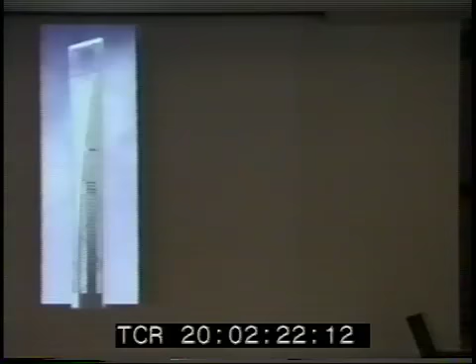So the goal here, of course, is to make money for the developer. That's why people build buildings. They don't build buildings to make you feel good or to make us feel good. They build buildings to make money. So we try to make money for developers, contractors, and other people.

The World Trade Center, for us, started in 1962. The architect, Minoru Yamasaki, received a commission to design the project. We had been working with Yama largely because of the talents of one of our partners, Jack Christensen, who produced a fantastic design in our first venture with him. But we got this project not because of Jack or because of me, but because neither one of us could have done it alone—it was because of John Skilling, one of those persons who has the golden tongue and is a real entrepreneur type. He was the one who actually made the pitch that got us the project.

So what is there about the Trade Center that's unusual? It has what we call a tubular framing system. People ask who invented the tubular framing system, and frankly, I don't know. I always blame it on Yamasaki, he always blamed it on me, and I always blamed it on Fazlur Khan. So somebody did it, I'm sure.

It's called an outrigger system. It was the first project put together with a linkage between the services core and the lateral core system, which in this case is in the outside wall—kind of a giant space ring. It was really neat because we had designed it but not actually included it in the contract. In structural engineering, it's good to have a back door—if this thing doesn't work, what are you going to do? So the space ring was part of our back door.

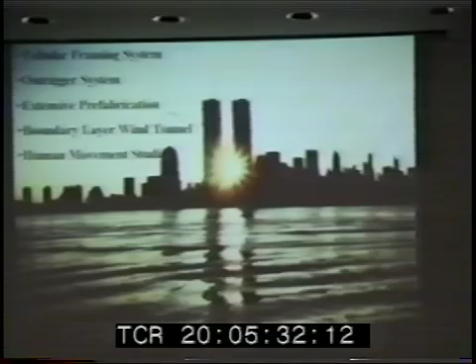Well, the World Trade Center is a billion dollar project when it was constructed, so you don't invest a billion dollars without being very sure. I went and rode motion simulators, and I have to tell you, if you ever get a chance to ride the motion simulators they use in the space industry, don't.

Then, in order to deal with the structure motion, we came up with the idea of a damping system. We looked at lots of different kinds, but eventually chose a viscoelastic damping system.

We developed a theory for taking the statistical nature of the dynamic pressures from the wind on the glass, as opposed to the statistical nature of the strength of glass, and put them together to try to determine the breakage rate of glass itself in the building.

And in buildings at that time, all the walls inside the building were made of block masonry, and they leaked a lot, and they were very expensive to maintain. So we developed again a theory for stack action. That's large buildings, kind of like a chimney - cold air outside, air rushes in at the bottom, rises up through the building, and goes out at the top. So we worked out a system that evaluated that so that we could design for the need for those pressures.

And then it was, I think, probably the first and maybe the last high-rise building or craft outside of the military and the atomic energy industry, first designed to resist the impact of a jet aircraft. In this case, the 707 intercontinental version, which was the largest aircraft of its time. We thought it was lost in the fog headed toward JFK or elsewhere, similar to the Mitchell bomber that struck the Empire State Building.

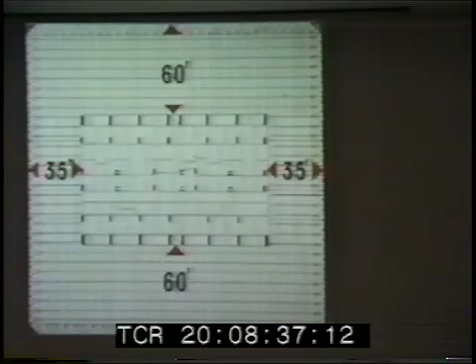And a lot of controversy over moving all these businesses out of that space. A lot of controversy. But they were well compensated for it, of course, but I don't think you can really ever get compensated when you're upended. And this whole district disappeared out of New York. There was no replacement for it, so there was no place you could go. Instead there was a store here and one over there and someplace else.

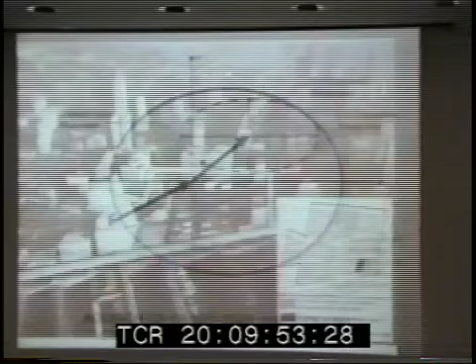Now we surmised, we didn't know, but we surmised that in the wind, if the wind blows, say in this direction, that the building would lean more or less downwind, not directly downwind, and then would oscillate about someplace. This came from experience that I had in working on offshore structures. I knew that that was kind of what they did, and I thought, well, a high-rise building might just do the same thing. You have to understand, the dynamics of high-rise buildings and the wind did not exist as a subject at that time.

This is a view of Lower Manhattan. The wind coming from the south heads up towards the northwest and goes over all these high-rise buildings, becoming very turbulent, whereas the wind coming from this other direction is over the water and is very smooth. So we designed for these two circumstances using this wonderful idea of Jensen and Franck.

Here you see the wind tunnel model. And remember, this is a billion-dollar project.

So we put a big tower on top of the telephone company building, put an anemometer on it, another anemometer on top of this spire, and another on a tower on top of the New York Athletic Club. We measured in full scale the turbulence of the wind over the city, then replicated it in the wind tunnel. And sure enough, it replicated, which gave us a lot of confidence that where we were going was kind of sensible.

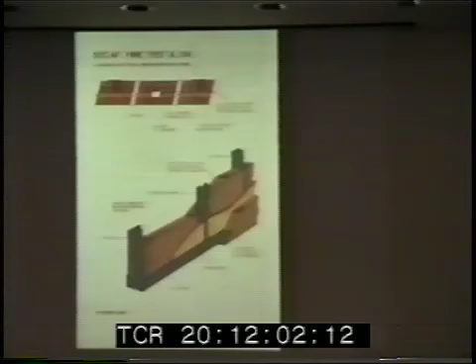The shaft wall partition system was wonderful because it was designed specifically to allow the structure to move without restraining it, and allowed the structure to move while still staying airtight.

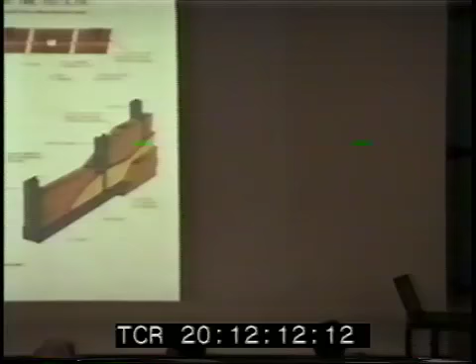I arrived at the idea because I rode on top of a lot of elevators in New York City, and went through all the buildings I could. Remember, the tallest building I'd worked on was 22 stories, so I thought maybe people who worked in New York might know something more than I did, which for sure they did. So I decided the basic partition system was terrible, sat down, and came up with this concept, which was then developed by U.S. Gypsum.

We did a complete structural analysis of the Empire State Building. This is a trace taken from accelerometers on the building. You see it's very almost random—no kind of neat oscillation can be found there. The only way you can come up with a period of vibration is to drop all this data into a computer and analyze it, and it tells you it's around 10 seconds, but you can't measure it here. So that's a 10-second period building—no way. Entirely different.

What was it about the building? The Empire State Building was designed for no wind load at all for the first 100 feet, and then 20 pounds per square foot above that. We were designing the World Trade Center for something in excess of 100 pounds per square foot. So you'd think the Empire State Building would have collapsed, or we were wrong.

But we did a structural analysis of the Empire State Building frame, and we could develop the stiffness of the frame, so we knew just how it would deflect under a given lateral load. Then by putting this data from accelerometers together with the known density, it's possible to experimentally determine the stiffness of the building. We found the difference was a factor of 5—the building was 5 times stiffer than the steel frame. All that came from the infill action of the masonry of the building, and we were designing a building without any masonry.

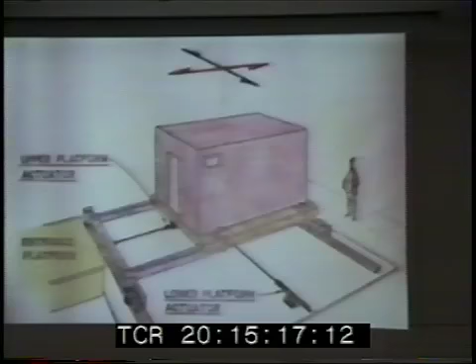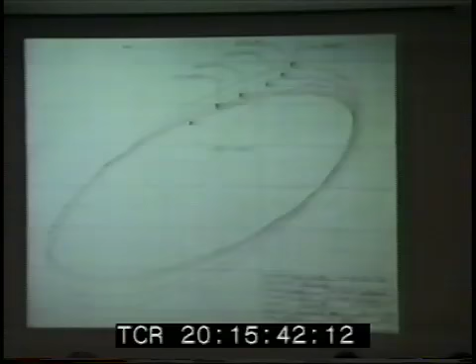And here you see one of them actually in the building. And then in glass—this is the glass, very narrow and very tall. And here you see the deflected shape of the glass. In this case, it's deflecting about 4 inches.

There was no data available on glass of this aspect ratio, that is long and skinny. Those of you who are structural engineers know that the strength is not really related to the span, it's more related to the area of the glass. But anyway, we tested lots and lots of panes of glass to find out how strong it really was, and also to determine what kind of glass to use. Ultimately, a semi-tempered glass went into the project.

Interestingly, about half the breakage of the glass has been due to bullets. That is, people from far away get a rifle out and lob bullets for fun, I guess. And at the lobby level, one guy was going by in a pickup truck with a slingshot and 1-inch diameter steel balls, and he would shoot at the glass. Each time he was successful in breaking one, it cost $15,000.

So here you see prefabrication. This is the bottom of the piece, and this is the top. These are big, big panels. These were prefabricated, and the guys go on top of that one. The floor system was prefabricated. Everything was fabricated.

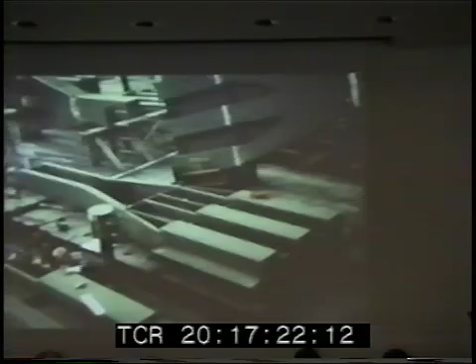Here you see in fabrication the length and width, the grade of steel, the welding that went into it—everything was provided to the contractor in punch card format. Those of you who are very ancient like me know what a punch card is. It's about so big, it's got lots of funny little holes in it, and from that you can read data. I don't know when they stopped using them, but probably before you were born.

Still using it for loading. Oh, I guess that's true. Well, we still use FM tape recorders too, but I don't know.

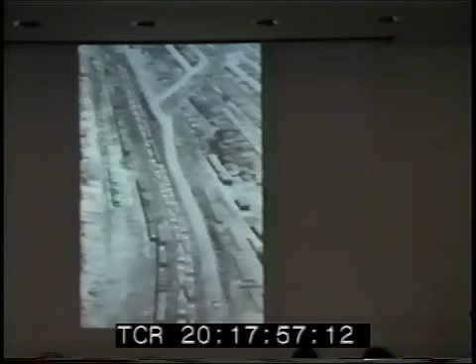Here you see some of those panels coming to the site, ready to be erected up in the project. So you see, it was an enormous logistics operation.

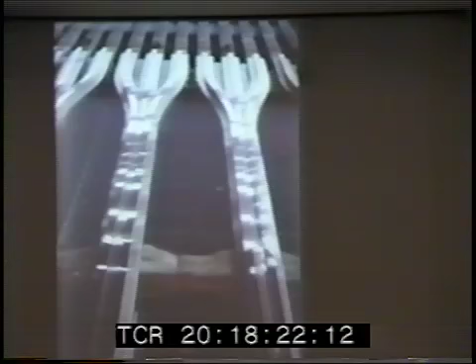So that panel we were talking about was spliced here. This was also prefabricated. When these aluminum panels were being put up, it was February, and the workers said, hey, these things are split, they're cracked. Now, steel was pretty much topped out, and if you don't think having split connections at the bottom is not an interesting subject, it was, of course. So we pushed the panic button and decided the problem came from water inside and freezing.

And again, we went as far from New York as possible—actually to Berkeley—and hired 2 esteemed professors who produced a report after a month and a half of work. They agreed that it was a freezing problem. In the meantime, we had to fix them all, of course, because you can't wait around for a report.

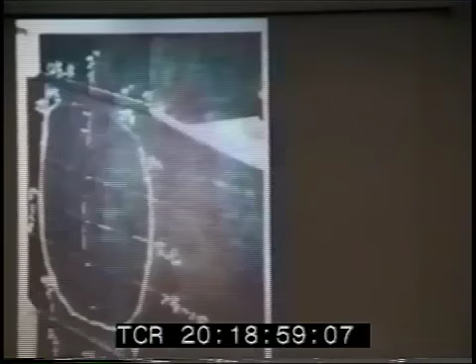This is sort of a standard piece, you see this bulge. Now, our client, the Port Authority of New York and New Jersey, was a fantastic client, absolutely incredible—they never said no on any subject. Well, they could be a little tough sometimes. But this is one instance when they overrode our judgment, putting control of water inside the structure in the hands of the contractor. Our policy is seal plates on all box sections so that you cannot get water inside for this very reason.

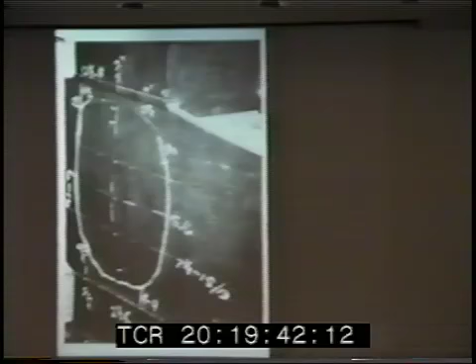That night, some 85 pipe columns broke on the split, on the adjacent small buildings under construction. These box columns were used for everything. If you had a hose with water running out of it, you didn't put it down, you just put it in the box column because then it didn't get people wet below. So there was water everywhere. We took out of some of these columns 600 gallons of water.

Billion-dollar project, let's not forget, after it was all done, got a completely new team, went down, looked for water, and found it. So, very big problem with water inside of the structures. But anyway, we got rid of all of it.

It's a prefabricated wall panel. There were thousands of these manufactured.

All the steel plate came from Japan, so punch cards, no way to send them across except by airplane. Today we wouldn't bother, but this plate and this plate and so forth, all of these were fabricated in Japan. In the United States, the steel industry was in the mood of, well, this is what we make, how can you use it? In Japan, it was, what is it that we could make that you could use?

So we bought steel for the project in increments of 5 ksi, which is fantastic for the overall toughness of the building, really fantastic. So we didn't have over-yield material in the project.

These were fabricated in the state of Washington. And this is a readout of punch cards.

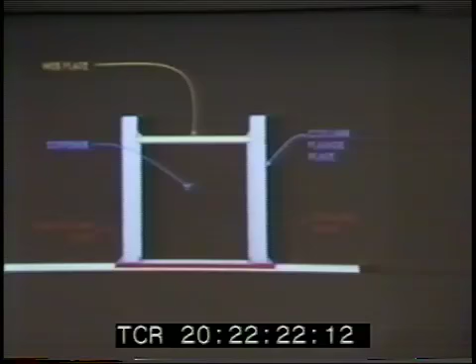Today, it'd be just like that. You pop this into your favorite finite element program, and out would come an answer. But at that time, that technology was not available, so we did most of the finite element work based on very big programs, but not suitable for actual practical work.

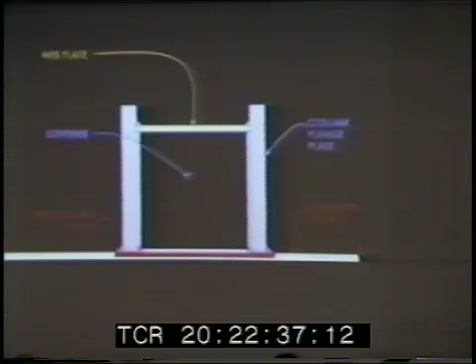So we did a lot of finite element work on the World Trade Center. Just to be this kind of example. Also did some physical testing, of course.

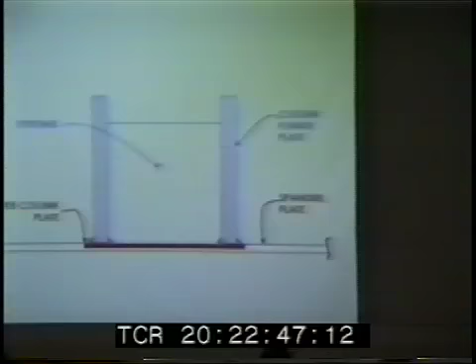So the way it was put together: first the bed sheet, as well as the flat plate, then the stiffener and the flange plate, and finally the web plate on top. It was done with such precision that it was possible to maintain a very tight tolerance between the architectural work and the structural work. Normally we would allow about 2 inches, that is 4 inches at the very least. But since our columns were 14 inches, that 4 inches was a big number.

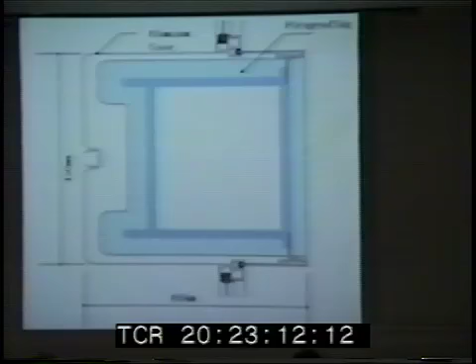Here you see them in fabrication. This is that first bed sheet, fabricated first. It was, in my experience, the first time that steel fabrication was done with the material moving by the workman rather than the workman going to the steelwork, leaning back on the technology, I guess, first popularized by Henry Ford.

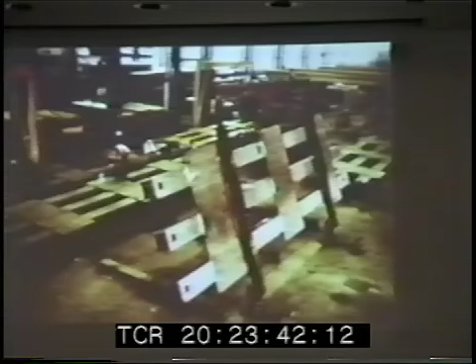Then assembled into big panels. Then these went into a jig, and the ends of the 3 columns were all milled in the jig without moving it. All the bolt holes were drilled in the panel, again without moving it. So we were able to maintain very, very tight tolerances in these panels. And it went together sort of like a Lego set. It was fantastic, they just went up, no problem.

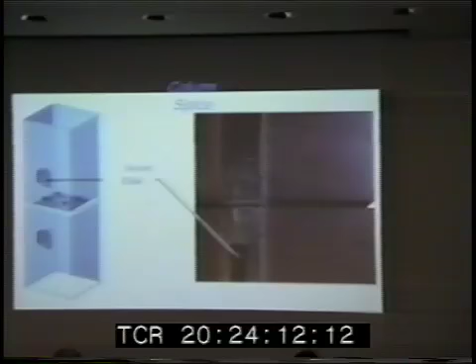To put them together, there were 2 holes, a large hole above at the bottom of the column and a smaller one at the top of the column. We basically put the impact wrench for tensioning the bolts right inside the column and tensioned the bolts.

The floor system was prefabricated. In this case, this panel was 60 feet long, 20 feet wide. The metal deck was already in place, as were the electrical distribution cells. So when you put one down, you created quite a significant space, 1,200 square feet. Here you see a panel in the air.

There was one attempt to bring these over by helicopter. These, of course, weigh almost nothing, they're mostly air. The pilot got over New York Harbor and decided he wasn't going to risk his life to carry it any farther. So sometime if you're out scuba diving in New York Harbor, you'll find it.

The associate architect decided it was important to have large openings through the facade. Remember, these columns are 40 inches on center. So they asked that we maintain big openings. This is a large opening, and diagonally across the building there's another opening just like it, and then down the side you have this one. So the openings are diagonally opposite each other, so that at no one level do they cross the complete building. But they were never used.

Great idea, like a lot of great ideas, didn't find fruition.

So here you see something about the whole assembly: prefabricated wall panels, prefabricated floor panels, and so forth. Not shown are the dampers because they were put in later.

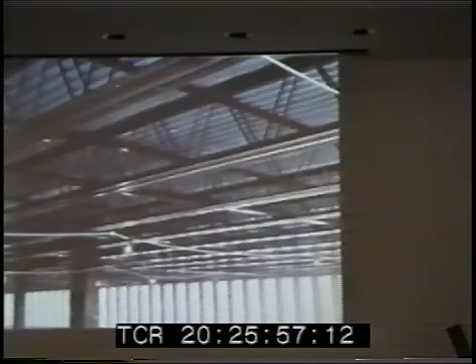The floor system has gotten a lot of press about being very vulnerable to all sorts of things. But in fact, it was designed so that you could remove, depending on where you were, 2, 3, 4, 5, sometimes 8 of these trusses, and the whole system remained stable. It was a grillage of trusses, as you can see here, not just a one-way system. Very, very sturdy system.

There's also been a lot of talk about the connection of these trusses to the outside wall. The normal criteria used by structural engineers is that the connection to keep a column from falling off the building is 2% of the axial load in the column. That's a good rule of thumb. This shows the actual connection capacity that was built into those spaces. So if you take the North Tower, it was designed for something like 15 or 18 times more than what you would consider standard criteria.

Here you see something about an important aspect of the Trade Center: not a single iron worker lost his life on the project. That was in no small measure because of this jail-like exterior of the building. Notice that the panels are spliced, only 1/3 of them in any given level. This is a splice, up one floor, another one, up one floor, another, so that there were no column splices in 2/3 of the columns in any given level, which again provided toughness and redundancy in the structural design.

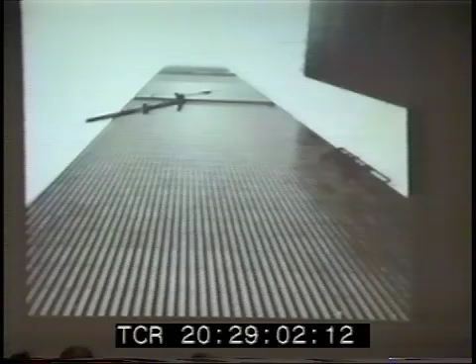Then there was the great day of the topping out ceremony. Here you see, well, it wasn't the last piece of steel, but a symbolic last piece of steel going up. I took this picture and then went inside, rode an elevator up, transferred, rode another elevator up, climbed a bunch of ladders and stairs, and finally got to the top, and this is what I saw. It was cold, and it was foggy.

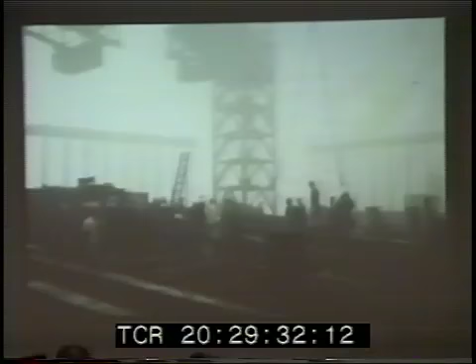Nobody knew where this piece of steel was, but I did, because I had been down on the ground. So I explained to the assembled throng where it was. I started out across the steelwork - in this case, it's the roof of the building. There's no prefabricated steelwork here.

And it was foggy, and it was cold, and the steel was icy. Let me tell you, it was really slippery. And I was walking very carefully. I have a yellow streak down my back.

But anyway, I got about halfway across the second beam, and I just stopped. I didn't know what the problem was, but I stopped, started to turn around and go back. No, I started forward again. Again, I stopped. And then I did turn around, and behind me were these TV crews.

They were walking across like it was nothing. Of course, when you have that kind of people behind you, you gain a new courage, or maybe you're too ashamed to show your fear.

But he didn't know until I explained it to him that these buildings oscillate in the wind. They don't do this way so that the cable stays nice and straight, but they do this kind of thing. So he was fortunate that no wind came up, and he's alive today and still performing. Great guy.

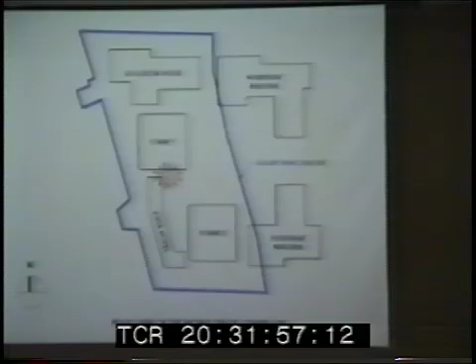We discovered that the bomb had gone off because we had 4 police cars out in front of our offices to take engineers down to the site. So we went down there. Actually, I wasn't there; I was at my house in Connecticut. But I discovered from the television that there was this problem. So we drove into the city.

The bomb went off, just coming from a metric world, about 6 feet from Tower 1, right in this area, right here. The bomb was about the same size as the one that took down the structure at Oklahoma City, almost identical in terms of the capacity.

But what happened was this steel wall, very heavy and robust, just reflected most of the energy of the bomb to the south. It blew a huge hole through the B1 level, and then caused structural damage about 350 feet into the south. Still significant structural damage.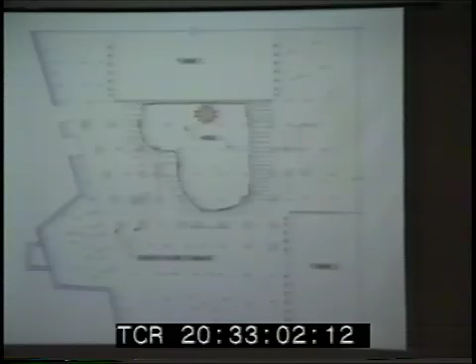But the bombers, I think, were trying to bring down the World Trade Center to make it collapse. But the most important thing that they did was they destroyed the airlock around the building.

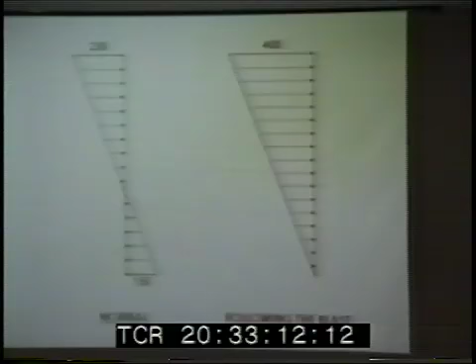Remember I talked about stack action? Well, when you go through the revolving doors of a high-rise building, you're going through an airlock. That's to prevent the air from rushing into the building, consuming a lot of energy and other things.

So when the bomb went off, it created a huge hole at the base of the building, and the pressure distribution went from something like this to something like this, and all of the smoke and soot and so forth from the bomb area immediately rose up inside of the towers.

And you saw photographs, I'm sure, of people coming out of spaces and clothes totally covered with soot, and great human suffering from that event. That was the worst thing that happened with respect to the bombing.

The next thing that happened was all of the debris from the collapsed areas of concrete work fell on top of the refrigeration plant. Now, it's just a refrigeration plant, you build a new one, but the problem is that if it couldn't be got into operation by June, you'd shut down the World Trade Center, because with no operable sash, no air conditioning, you cannot work in the building.

So Port Authority built temporary refrigeration plants outside. Now, the day of the bombing, or the night of the bombing, just before midnight, 4 of us went down to the basement to look at the refrigeration equipment because I wanted to know what was underneath all the debris. I knew it was there.

It was the refrigeration equipment, but 4 was too many people, and our flashlights were too small. So the next morning, after a couple hours of sleep, I went down by myself and looked at the refrigeration equipment.

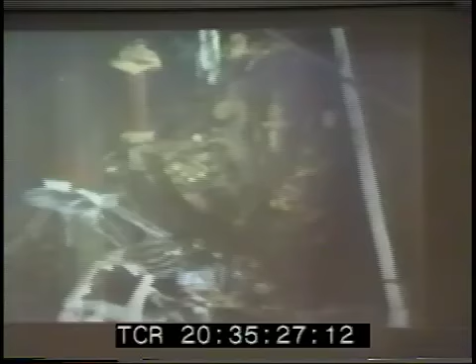We brought people out of retirement. The average person in the office worked 90 hours each week. We served breakfast, lunch, and dinner in the office, working through all three meals. These were working meals. The devastation was pretty bad, and these columns were supporting a hotel.

Those of you who know about columns realize they're designed with lateral supports, and when you take the lateral support away, there's the prospect of buckling. So it was a mess. Remember all this heavy stuff sitting on top of the refrigeration. So these columns were actually braced. They were fixed-ended, if you will, by being buried in this mound of debris.

But it's hard to calculate the lateral support from debris. So that night, Friday night, I worked on bracing these columns. This morning, I made the sketch, had the fabricator into our office at noontime. They agreed this was a good way to do it. Looks pretty neat, right?

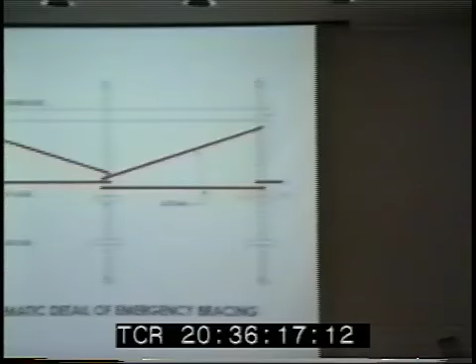The reality was not quite so nice, but it worked. It was possible to do this really fast. We thought that we could start on Sunday, and the steel was delivered on Sunday, but this was a crime scene.

We had a sort of summit meeting because there were 5 different police jurisdictions. We had a summit meeting about every 3rd day because someone would say, well, you can't go into that part of the work. Our response was very straightforward: you can't go there either, because we controlled where in the project people could go. So it was a sort of standoff every 3rd day.

But on Monday, we were able to get a hole through the floor and start lowering people down. In fact, this photograph was taken from a kind of boatswain's chair, dropped down through a small hole into the middle of this great abyss.

So this was the situation. Refrigeration equipment down here, a lot of rubble piled on top of it. And one of the exciting things is that this support, which was really critical to this slurry wall which keeps out the Hudson River, was working because the slabs dangled down into the debris.

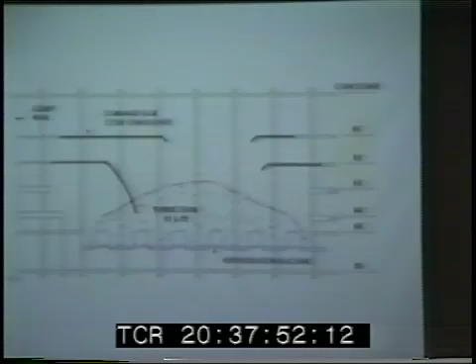So it was the concrete structure holding up the refrigeration equipment, holding up the debris, holding up the collapsed slab, which was in fact keeping out the Hudson River. The whole logistics of taking out this, doing this, over there, represented thousands of drawings that we produced in our office. Much of the work we did was just that. It was not so much designing things, as it was sorting out what could be done in terms of the actual operation itself.

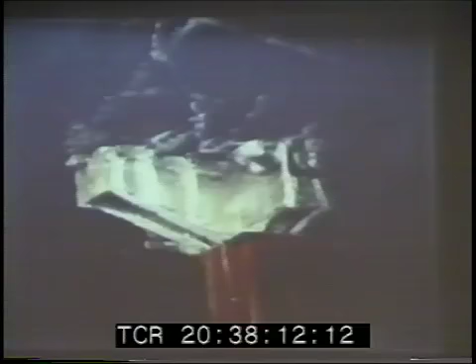Those of you who know about shock waves, these are drop panels, a very good picture. Drop panels for a flat slab system. The pressure wave would come this way and hit the forward edge of the drop panel. It would pretty much leave it there, no big deal. But get to the leeward side, and the shock wave going on would put the concrete in tension and ripped off most of the back sides of the drop panels for about 200 feet.

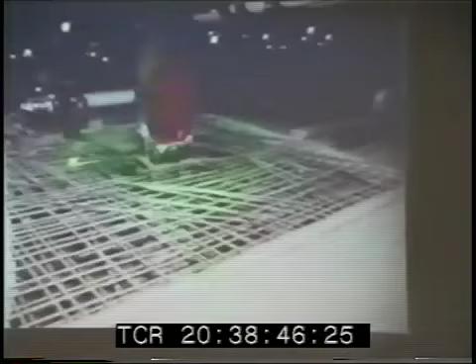This exciting structure is there because there was a big fire some 5 years earlier, and rather than try to evaluate the quality of the reinforcing steel and so forth, we just bolstered the slabs with these elegant devices. Much of the repair was like this: just knock out the concrete, which was all cracked and broken, jack up the slabs, and reconcrete it.

Now the bomb went off 6 feet out this way from here. There was a diagonal brace here and this one, and a column. This diagonal brace is made like a T-section, bolted together in the center of the web. And if you look at the picture carefully, you see the flange of the T goes right by the column. It doesn't intersect the column.

It goes right by it, and it's a kind of an applique. The detail works extremely well because these columns are not exactly where they're supposed to be. They're always out of position, twisted a little bit and so forth. So this detail allowed us to carry very heavy loads through the system without having actually connected to the column itself for large forces.

Anyway, this brace went inside, killed 2 people. The outside piece fell into the hole and was never found. It just got carried out with the debris. And the other one, here you see a view looking at the other one. You see this big crack here. This took place, of course, because of the impact loading.

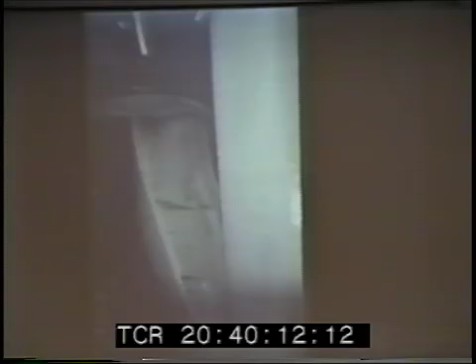You can't do this in a testing machine. You've got to hit it with a giant hammer. This piece, no one knows where it went. It disappeared someplace. And this one was hidden by the ironworkers because I admired it, and I stuck it off in the corner where the Port Authority couldn't find it, and then later on, they took it out to my house.

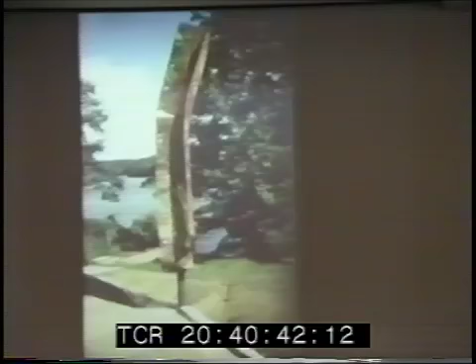Here you see it when it was first erected.

So there were lots of cars. The place was full of automobiles.

This slab used to be up here. I took lots of pictures of automobiles because imagine if you had an automobile in this space—wouldn't it be great to have a picture of it? Well, I took pictures, particularly of the license plates. I photographed the automobiles and sent them to the people who owned the cars. There's hundreds of thank you letters.

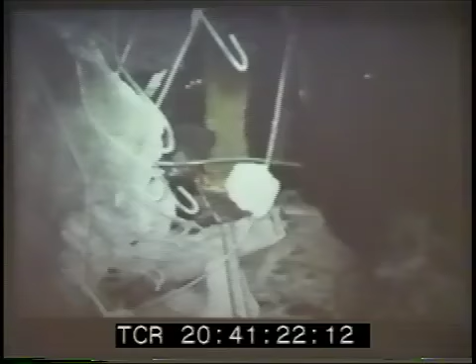Wherever there was structural steel around, the concrete suffered more.

All of the telephone conduits from Lower Manhattan went to the telephone company building through the basement of the World Trade Center. This is a tiny fraction of the area. So we put a team to work around midnight, and at 9 o'clock in the morning we went down with the drawings of how to hoist all this conduit back up and get it off of the cars, because you had to remove the cars before you could get to the structure, and you had to inspect the cars because that's what police do.

Interesting enough, not a single wire was broken in the operation. I blame that on the contractor who was being too careful.

We had all these—this is a terrible picture, but these are bomb squads—they were out there with dustpans and whisk brooms going through the rubble looking for pieces. Later on, I testified for 2 days in the trial of the 5 who were convicted of this matter, and these people picked up incredibly small pieces of that van. Unbelievable. Big pieces, little pieces. They had almost the whole van.

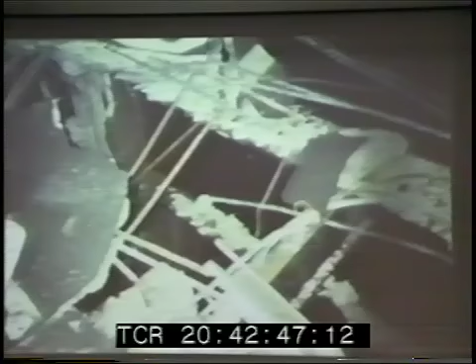Every time you got near structural steel, the concrete broke up very badly because it could not deflect away from the pressure wave. Remember, this is not a static loading that's taking place here—it's a more or less instantaneous loading.

Anyway, it was finished and this memorial was built. I always hated the memorial, but it was built, and again, we sort of went back to sleep and forgot about the World Trade Center.

And then Minoru Yamasaki came down with cancer, and he was in Sloan Kettering, which is a famous hospital in New York City. I went to see him every day. He wanted me to look after the Trade Center, and not only that, he wanted me to make sure that the young engineers would continue to look after the Trade Center.

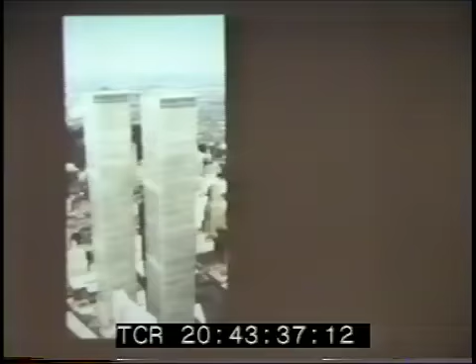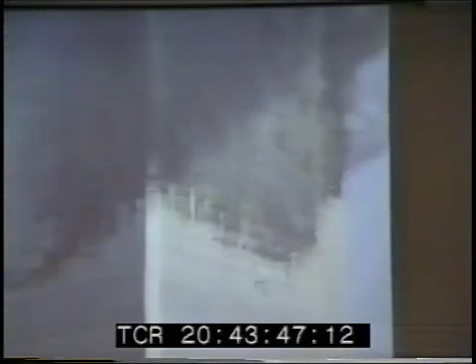Anyway, then this is it. This photograph was taken from our offices. If you saw the slow motion videos where they were just looking at images one at a time, you discovered that the whole airplane disappeared into the south facade and could not be seen, and then the great fireball erupted.

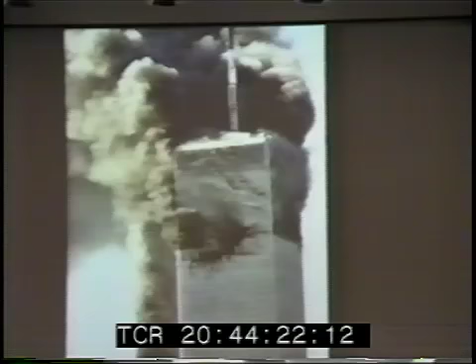So this is the north face of the North Tower, and you see that a very substantial amount of structure was removed, and yet the structure above was able to span over this huge opening, seemingly without stress. This is a sort of blow-up that took place.

Okay, a lot of you know about energy and impulse and momentum and all those things, and I don't want to have a big discussion here on that subject. How much of the energy went into crumpling the airplane, how much went into ruining the buildings, and how much went through and came out the other side.

This is just to give you scale. The Mitchell bomber that hit the Empire State Building had this much energy—it's just a little mark here. We designed for the 707, but it was more or less a fuel-empty 707 because it was a landing 707, and it was lost in the fog, so obviously they didn't have the hammer down on the throttle. This, in fact, is the kinetic energy of the aircraft that struck the building. So you see it was many times larger than the design criteria.

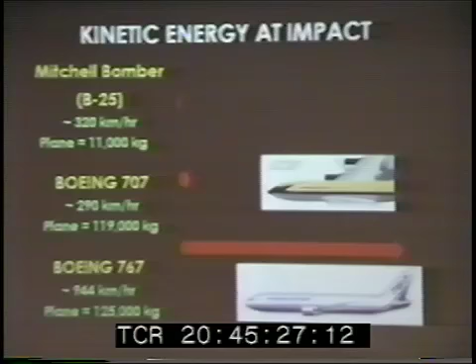The fire safety issues in the building were not our responsibility, although we dabbled in most everything. But in any event, I don't think anyone knew what happened when you crashed a 707—all those tests were done later. This is the amount of fuel that was in the Mitchell bomber, and this is the 707, which is what we designed for. And this is what was in the 767 that hit the building.

Again, this is not a good comparison, but the bomb at Oklahoma City, which is pretty well documented, even the one at the Trade Center, had about 200 liters of fuel compared to 45,000 to 46,000 in the 767. So you see a huge difference in the amount of energy released.

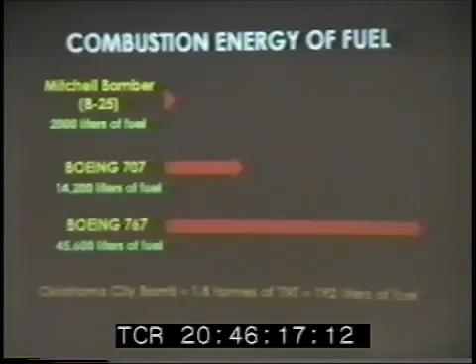In terms of kinetic energy, we can't even include the Mitchell bomber because it's too small in terms of the amount of energy released. But here's the 747 as compared to the 767, and this is the new Airbus.

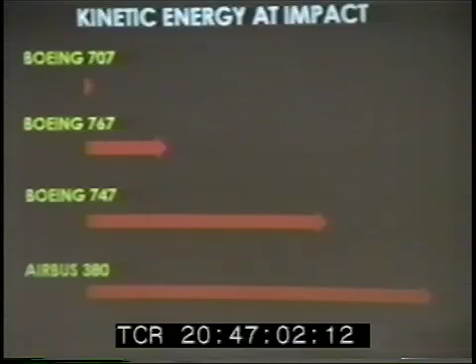In terms of fuel, not so startling, but still, when you think of what happened to the Trade Center with not quite 2 tons of TNT, which is about 200 liters of fuel, compared to the over 300,000 liters that comes with the new Airbus, you realize that it's not practical or sensible.

I mean, you can design anything for anything, I guess, but you can't design buildings that you or I would ever want to live or work in for this kind of circumstance. Totally out of the question.

Engineers have written saying, well, it's patently ridiculous if the project wasn't designed to take the impact of the aircraft. I don't understand what's in their minds.

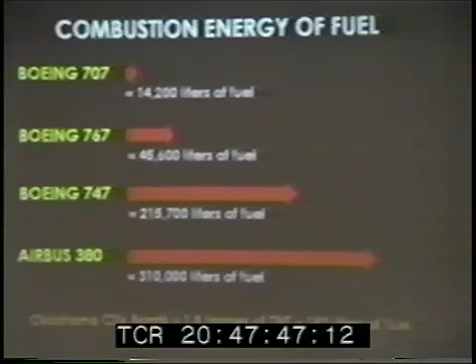You could land a 767 inside of the World Trade Center - it would look like this. This is the North Tower. Remember, the plane is traveling in this direction in a strong axis to the columns. And in the South Tower, in this direction, we're going in a weak axis to the columns.

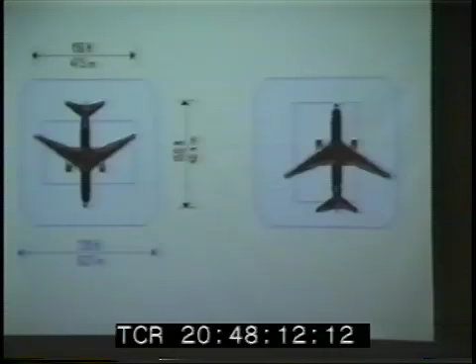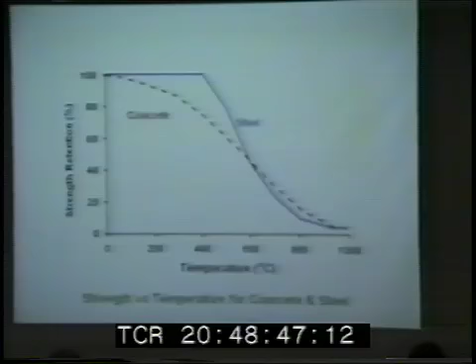People said, well, you should use concrete fireproofing, and this shows you something about the strength versus temperature of concrete versus steel - you see there's not all that much difference. What happens when you put this high energy on the concrete, it sort of just goes off like popcorn. It just flies away.

Indeed, if you look at the columns of the Pentagon, which were square with a round cage of reinforcing inside, after the impact the columns were round - that is, all of the outside concrete was gone. So the reinforcing steel was then exposed.

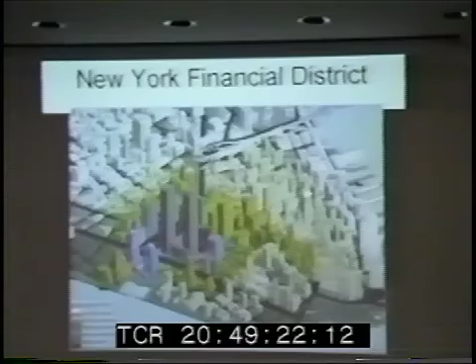Okay, this is the area that was at least partly damaged because of the circumstances of the 11th of September.

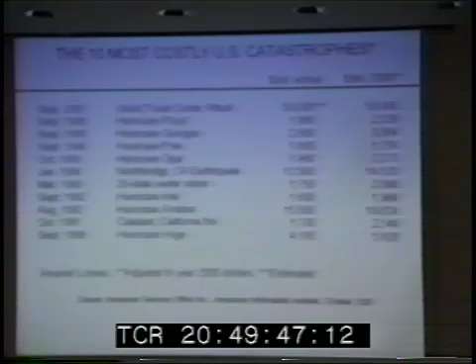I'll show you some pictures. We did the base of the hotel, but other engineers did the superstructure on top of it.

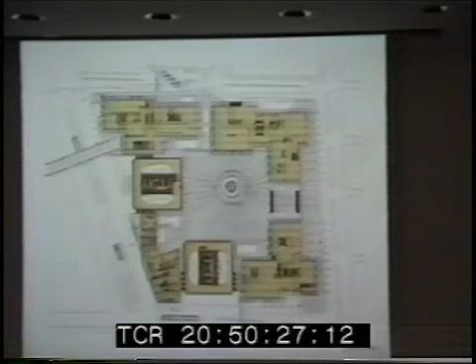So this is Building 4. You see a piece of, or part of, the North Tower fell down and just wiped off the corner of the building - just gone completely.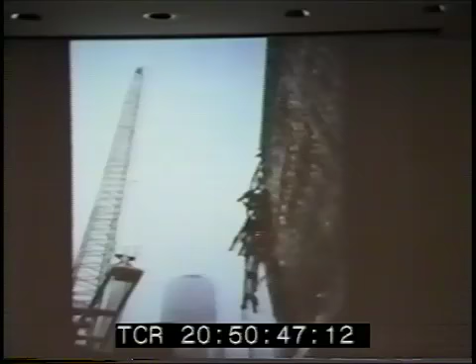If you go between Buildings 4 and 5, you see some of these wall panels - you recognize the 3 columns wide. They fell down and the building was able to support them. You see these pipe columns are all bent and buckled and so forth - that's mostly from the fire that took place.

Fortunately, the structure was very redundant. There's a moment frame that goes back into the building and then the columns on the outside, and there was a load distribution between the two so that you could take out columns or take out frames and still it wouldn't fall down.

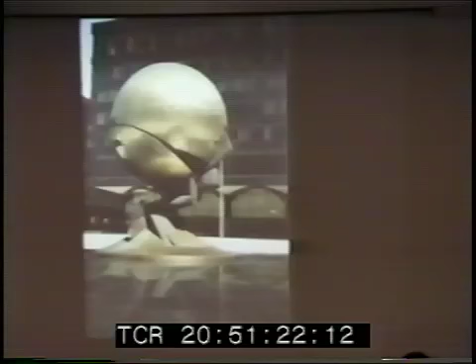There was a huge sculpture piece in the middle of the plaza - it's another thing I've always hated. You won't believe it, we designed the crate that this thing came in. I sent an engineer to Germany to supervise the crate - it was that expensive. It came here, and then after the event, it looked like this. So it did pretty well.

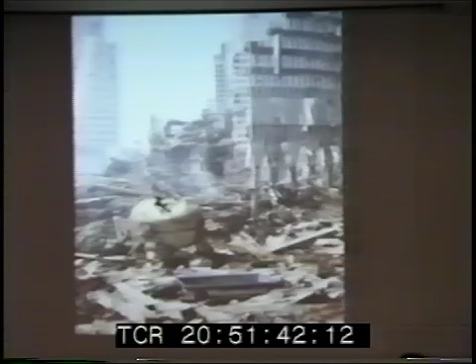This is the east wall of the north tower. This is part of the services core of the north tower. Looking at what was the south tower.

You can see it was not a real safe place to work. All kinds of things hanging out and rooted in who knew what. And this wall panel was spliced up here someplace, and nobody knew the condition of the bolts, but still people were working through the area.

This photograph was taken on Sunday following the event. I was in Hong Kong when it took place, so with good help from the government of the state of New York, I was able to get back to New York really fast. But it was Sunday when I took these photographs.

So the firemen were out there. The project burned for about 2 months and even later than that. But the firemen and the policemen were out there. They weren't worried about the fire, they just let the buildings burn. They were concerned, of course, about the people.

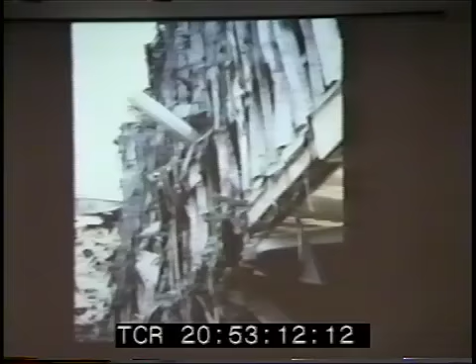So this is Building 5. You can see that this is a piece of the tower which failed inside, rigid frame going inside, buckled columns, and the great fire. Where really heavy structure came down, it would just wipe out the building. So you see here a whole bunch of structure fell and just took out, in this case, the south face of Tower 5.

Our people, the respirators were mandatory. We didn't let people go out on the site without them. There was a huge asbestos abatement program there, but almost all of it was gone, and there was regular monitoring in the air. The Port Authority was fantastic about things like that. But still, it was extremely dusty. We have the 47th and 48th floor of a building looking down onto the site, and we just taped up all the windows because it keeps the dust out.

That's Building 7, which is just to the north of the project. People have asked me about this pile of dirt - why is there a pile of dirt in the building? Of course, concrete is made out of sand and gravel, and when you pulverize it, you get back sand and gravel, which looks like dirt. So this is really pulverized concrete that you're looking at. You see it everywhere.

This is, again, next to Building 7. This building stood up pretty well, except for a little damage. Building 7 collapsed right through here. Here you see one of the transfer girders from Building 7.

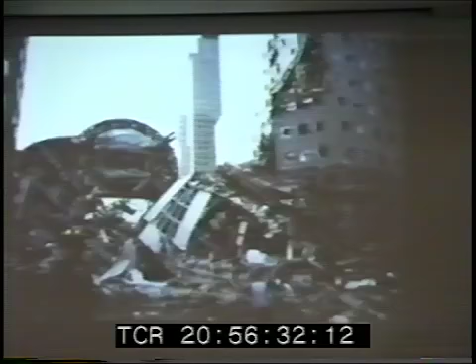So Winter Garden, designed by the architect Cesar Pelli, led into Battery Park City. This end of it was pretty badly damaged - this used to be a bridge across the street. The other end, however, was in impeccable condition - very dirty, but not damaged at all.

So here we look at what was left of the South Tower. This is looking towards the south and east. The photographs were taken - if the National Guard caught you with a camera, they took the film. So sometimes the color balance is a little bad on these pictures because I was hiding it in my shirt and stuff like that.

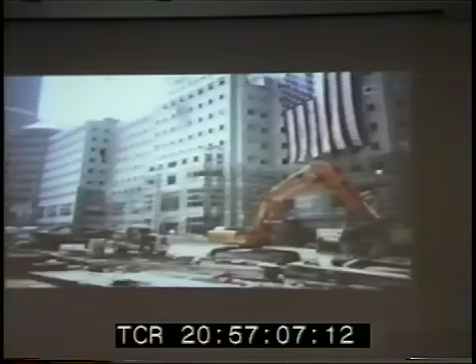Really relatively superficial damage to the buildings across the street, but still months before these buildings will be in operation.

Now, this structure is in some ways strangely beautiful.

This is a bucket brigade. These people are taking debris out of here and passing it back and dumping it in order to look for people.

Extraordinary, dangerous work. All this we remember now as the Sunday after the fact. Actually, this was a sort of regular path that everyone went through. We looked up and saw this kind of stuff.

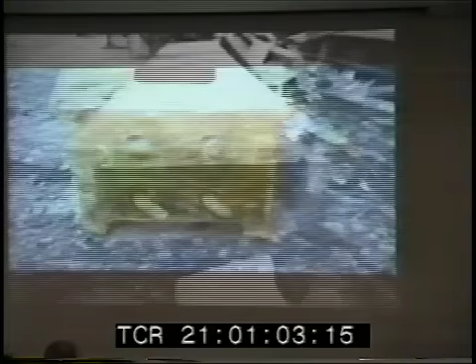This kind of column was low in the building, on the service floor. You see this 4-inch thick plate—it either hit something or was hit by something and fell. Not due to the aircraft, but due to the building collapsing.

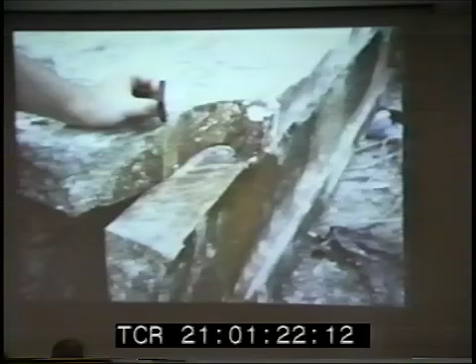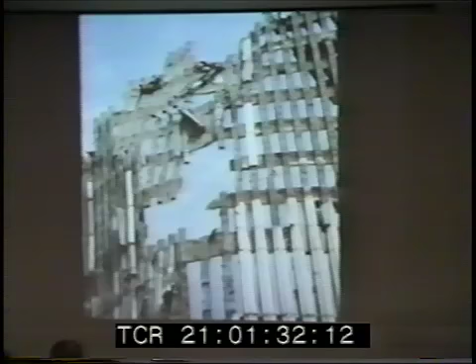The hotel was here. This is South Tower. Here you see one of those prefabricated elements now dangling off of the construction. There's no support.

Those of you who are not in the construction business might not understand this red stuff on the outside. If you're ever around a high-rise building and see it's on fire, don't stand there and look at it. Leave. Because the fire causes the glass to break. When the glass breaks, it kind of floats down through the air. It can travel long distances horizontally, and it sort of floats and floats, and so forth. So if you get hit by a piece of glass, you might not survive. This netting is just to keep the glass from tinkling down and going outside. The building immediately to the south had some pieces hit it, removing this column completely.

This is a big controversy. This is Building 6, and they wanted to demolish it by working from west to east. We said, well, nobody knows how strong that building is now, and it's holding up this steelwork from the North Tower. So demolish this first and then go for the building. They added about 2 weeks onto the demolition time, but I think it was worth it because no one really knew what would happen if you just went ahead and demolished the work.

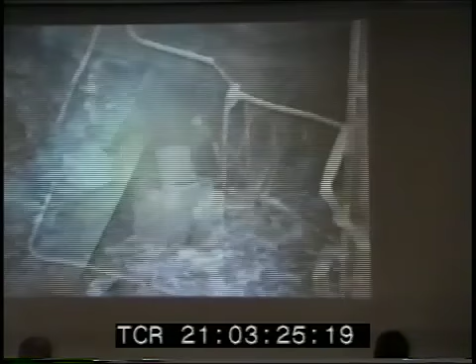Go down to the basement. Remember the bomb in 1993? This is that same construction again. You see the box column—these are 4-inch heavy columns, some of them up to 80 and 90 yield material. You see, when they tipped, the whole wall tipped over, as you saw in the photograph. It sometimes fractures out large blocks of steel like this. This steel was not particularly ductile. It wasn't intended to take any great lateral force. The lateral force went down through the diagonal system, so there was no intent that there be any bending or anything of that sort in these columns.

This building was done by the architect Cass Gilbert. It's a terracotta facade, and it looks now as though it's going to be saved. I know that if it were to be taken down, there would be people lying in the streets. It's a beautiful old building in Lower Manhattan, one of 4 or 5 or 6 buildings done by architect Cass Gilbert. So I used to have my office there.

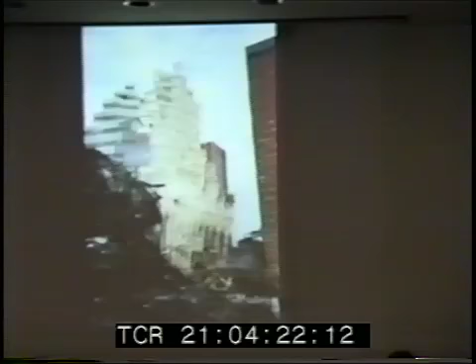You get around in the basement areas which had about 6 or 8 feet of water almost right away. You went by boat, but it was pretty uncertain as to what was down there. We went down with air tanks because of a concern about the quality of the air itself, not because we were going diving. Notice there's no motor, just oars, because there was no desire to have sparks or anything burning down there.

Because when you were down there, you have to remember above you the project was on fire for months. So we were down at the B1 level, and one of the firefighters said, I think you'd be interested in this, and they pulled off a big block of concrete, and there was like a little river of steel flowing.

This is what's left of one part of the TV tower that used to be on the one tower. In fact, this is south of the project.

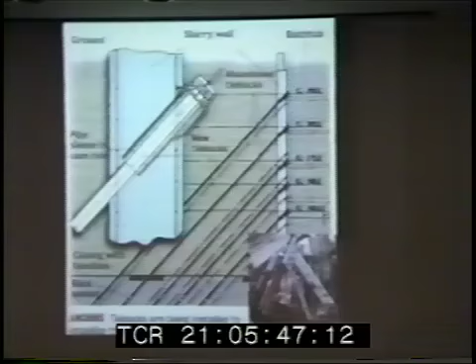The slurry wall was built with the tieback system. The light lines were the old tiebacks, which were long ago de-stressed, and the new tiebacks were put in place for the dark lines. Pretty conventional system. There have been some scary moments down there with the slurry wall. I'm sure it will never be used in the future as structure, it will just be used as an outside form for the construction of a new wall.

This is the ASCE FEMA team, or I guess I should say FEMA ASCE team. In New Jersey, one of the junkyards, you can see the steel was just piled up, this tangled mess. To the extent the steel has been found which was near the site or at the site where the plane struck, that steel's been removed. I guess it's going to NIST, which has a multi-million-dollar contract to look into the issues.

There was one professor from another university who had set aside a piece of steel which he said was from the impact area, and he was very proud of it. It had an aluminum piece of the airplane on it. But I looked at it, and as you can imagine, every piece of steel has a number on it, and you don't just look at it and say, well, I think that might go on the 37th floor. You have to know where it goes. It was actually a piece of steel from the 44th floor, which is rather far from the impact area. And the aluminum work was, in fact, part of the facade.